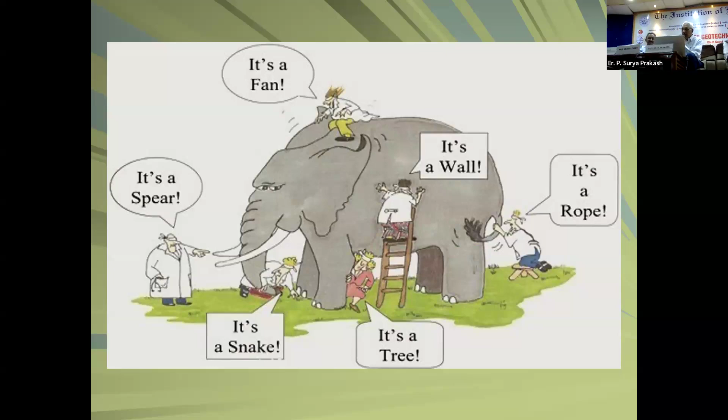So basically what I would like to say is that these are the GeoSutras I presented to the International Society: that the ground and soil are not the same. Soil is an element I can pick up in my hand. Ground is an entity at the site. So there's a big difference between those two.

Ground is not homogeneous or semi-infinite, which is what many of the people in the analysis assume. Ground in nature, in most of the time, is over-consolidated. That is, it has been subjected to higher stress, and that is why, if we don't consider that, we over-predict settlements, and Balaji highlighted that actual settlements were much less than anticipated for the simple reason the over-consolidation effect is ignored.

The other one which I will be presenting also: ground is not steel. Coming to bearing capacity, the whole concept came assuming the ground to be steel. And I'll show you why. And the properties that you get from these agencies are from the laboratory. The ground has a very different set of parameters.

And I'll elaborate on these in my presentations too. And then, of course, there are many other things too. But what I would like to come back to would be, what are the GeoSutras for the structural engineers?

Again, soil and ground are not manufactured material. The problem with structural engineers is they deal with cement, steel, concrete. They don't deal with the natural material. I'll come back to that again.

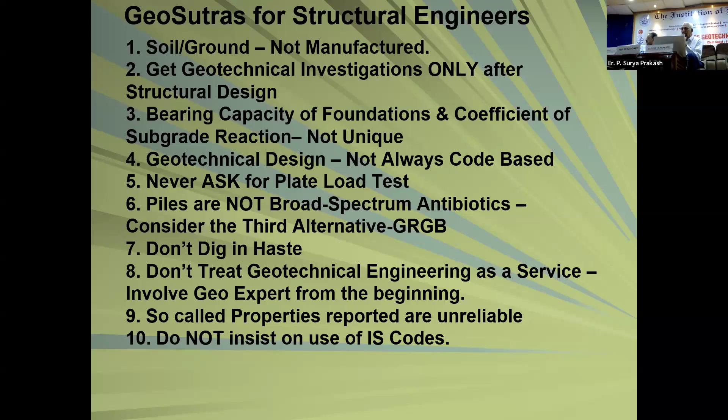I just want to give you an idea. Look at the kind of soils we have. I put it on the right-hand top corner. The variety of soils is infinite. You can have gravel, soil, sand, silt, clay, brown, black, whatever it is.

And if you look at the bottom right-hand corner, we see the people. If you look at the country, do you think all people in this country are the same? We're all human beings, I'm not saying otherwise, but can I say that you can see the variety from Northeast Arunachal Pradesh to Kerala, or Kashmir to Kanyakumari? And look at the ground, the left-hand top corner.

If I have an X-ray, I can visualize the kind of strata you have - different layers, different thicknesses varying everywhere. Or even a simple bridge site - can you see how the thickness varies? At the center of the stream, you have high, soft soil. As you go toward the embankment or the bank, you have a different strata. Can I give a single value for this site? That's the biggest challenge we have.

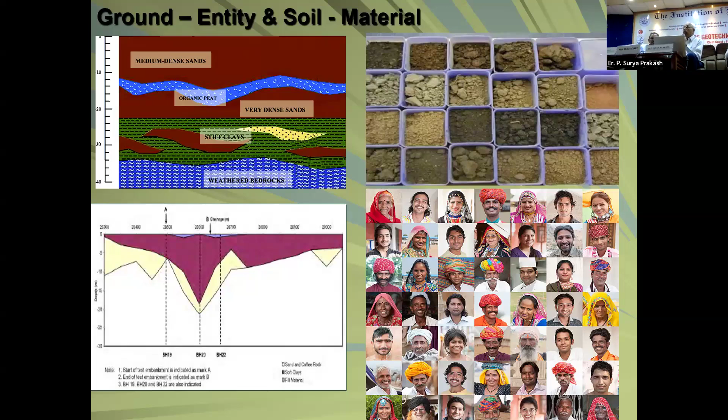The point is, even a crowd can start becoming a mob. You know what's the difference between a crowd and a mob? In a crowd, you have your individuality. In a mob, you don't. Somebody says, burn that bus, kill that guy.

Does anybody think? No. Similarly, I have a small soil element which I test in the laboratory, or I have a ground. When I go to a site, maybe it is something like 100 meters by 75 meters - that's a large area. Can I take 2 samples which are 75 millimeters long, 37.5 millimeters in diameter, get some property, and say this is the property of the whole ground? That is how it is.

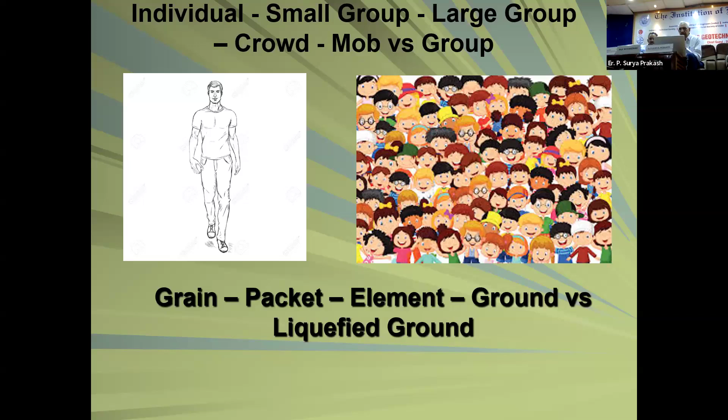This is on the positive side too. There are some other problems too, but I'll come to the third one. This is a multi-story complex in one place where they had alluvial soil, as you can see, and the values increase with depth. And the report says go for pile foundation. They recommended very low bearing capacity, but pile capacity of something like 120 tons.

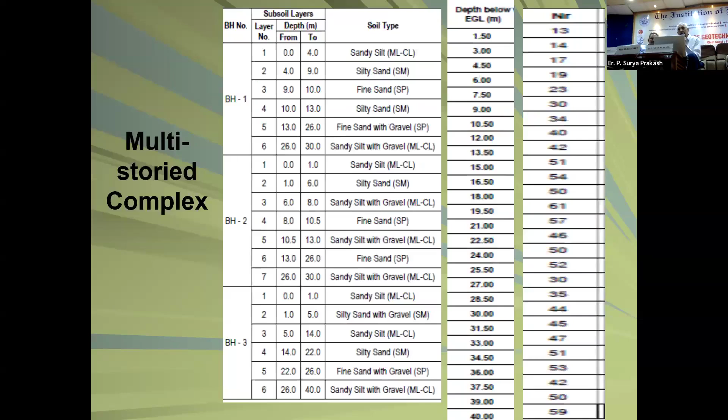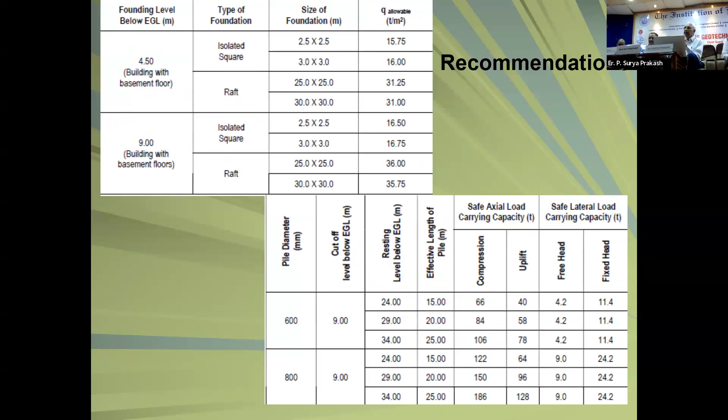They came with the same data for me. I said, this is ridiculous - this ground can give me a very high bearing capacity. After my calculation, I gave them a value of something like 300 - I mean they gave more, but they decided on 223 tons as the pile capacity. They are not very sure. I'm sorry, 316 - sorry, 24 meters. I gave 320 or 316 tons as the pile capacity. This is again in Ghaziabad and Noida. And I said, I can prove it.

I said, if you're ready, you can go up to 450. But of course, no, they saved anyway about 40% of piling, which means cost became much less, and they were very happy with that.

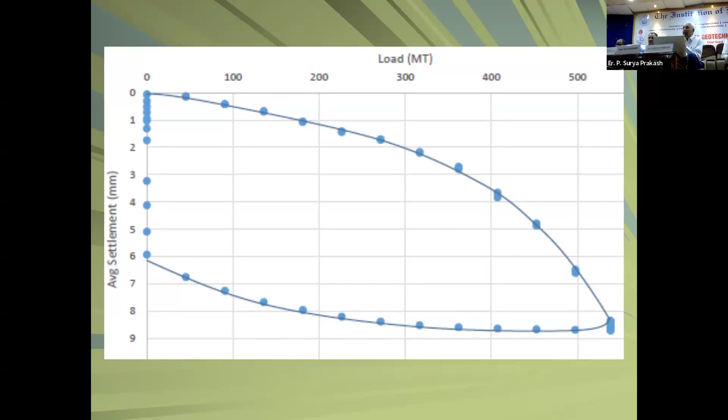So what I want to present to you would be very important. The important thing in science of life is not so much to obtain new facts as to discover new ways of thinking about it. Please remember, I want you to switch off from your traditional value, thinking that soil or ground is something I can test and get the value. It's much more than that.

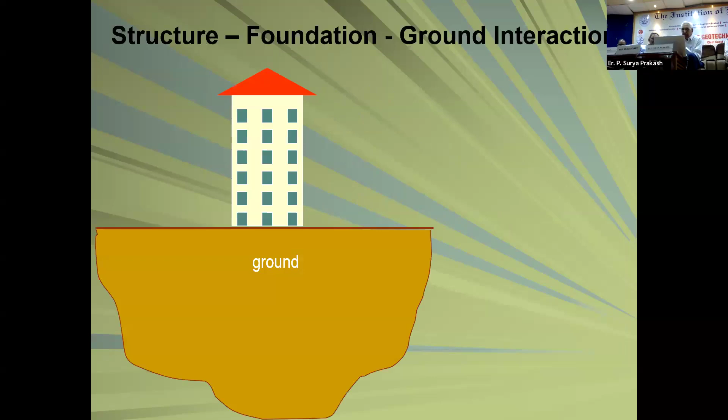I want to tell this to structural engineers that they're very good at designing something above the ground. But every building has to rest on the ground. Isn't there an intermediary which takes the load from the structure and transfers it to the ground? It is called the foundation. So don't you think the people who are investing so much on structural design should know how the ground behaves, or at least interact with people and come up with the proper design.

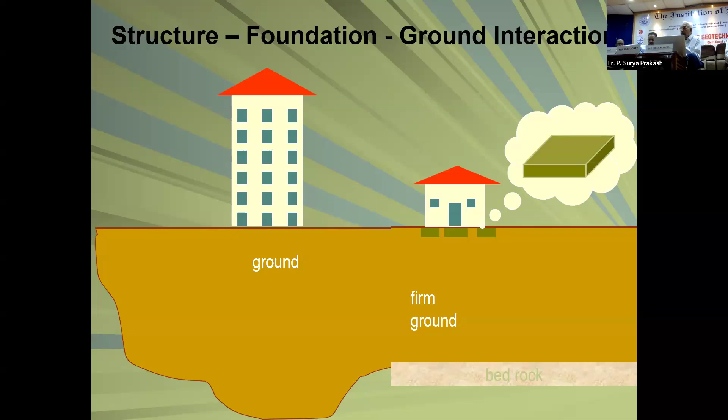That is the biggest problem. The reason is, there's a lot of difference between structural and geotechnical engineers. They deal with steel, whether you buy from Tata, ArcelorMittal, or SAIL, the properties are the same - 415 megapascal, 210 gigapascal, 550, whatever it is. And concrete, you say I want M35, M40, they're again manufactured materials, and most of the time we get it from RMC, and you know the property.

But as a geotechnical engineer, am I dealing with a manufactured material? It's a natural material - if you are spiritual, you say God made it - and the properties are constant or variable. You add water, what happens to the soil? It becomes soft. If you dry it, it looks hard. So can you say it has a fixed property? No, that's the problem. There are a lot of complexities when you are looking at the interaction.

Please remember the three things: the ground, foundation, and the structure. It's not one alone, you have to have that perspective. There's a lot of uncertainty in ground conditions. If you put two boreholes, one here and another there, will you get the same characteristic? No.

How much do you spend on geotech exploration? Normally, we recommend half to one percent of the cost of the project. People are thinking about it - they say 10,000, 20,000. And some other people, they're like bargaining when you go to buy vegetables. They say some kilo is 40 rupees, can you give it for 30 rupees?

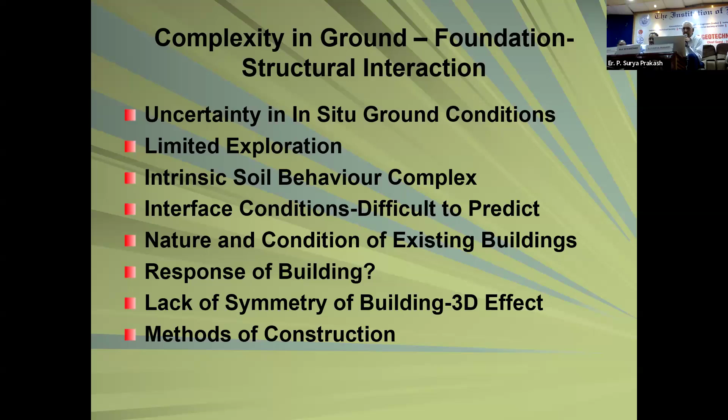How do we construct? The other thing is structural engineers use a lot of mechanics, very good theory, it works, geometry is known. You have a column, beam, slab, etc. Are there any complex geometries, unless you're looking at one of those very special shells? Material properties are known, a lot of theoretical solutions are available, and you have a code for the design.

I'm a geotechnical engineer, I'm looking at a variable geometry. I showed you how the varied properties of strata vary at big depth and over the site - highly variable. I cannot even know the property or design precisely, I can't determine it. Give me any property, and I'll show you the opposite is also true. Loading is very complex too. So when I give a decision, it is not code-based, it is judgment-based. I use judgment, that's what I do.

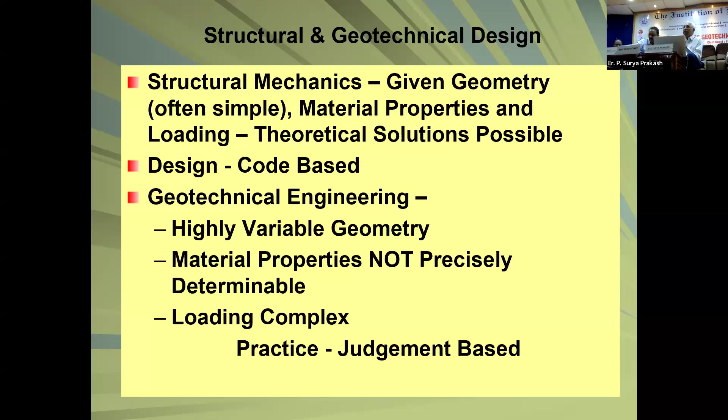So here I want to say something. Those of you who are married, I would recommend you read this book: Men Are from Mars, Women Are from Venus. It's a fantastic book by John Gray. You will understand your spouse. If you are a male, you are left-brain oriented, highly logical and analytical. Women are right-brain oriented, they have much better vision, image processing, fantastic language skills and other things.

I'll give a simple example. I want any of you to try this - if you wear a wristwatch, cover it. Can anybody try? Can you tell me what is the dial - is it Roman numeral, Arabic numeral? No. I can tell you 90% of the men wouldn't know. But ask a lady - she goes to a party, she remembers who wore which saree, which jewelry, and she will remember whether they wore it at the previous function.

This is a fantastic right-brain oriented creativity. What you need when you're dealing with ground is that kind of right-brain oriented work. So structurally, these are from Mars; geotechnical, they are from Venus.

We should encourage more women in geotechnical. Men are there, but they have to use their right brain. You can't take away the men, they're already there, but in geotechnical engineering, in tunnel engineering, we have a lot of women coming, and we're okay with that.

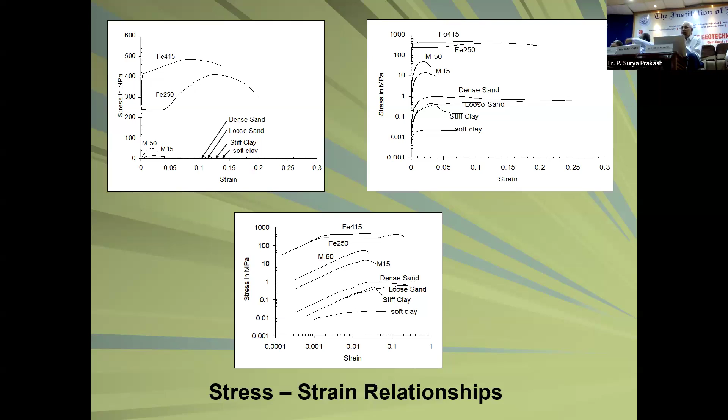Just to give you an idea, these are the numbers. Steel, ultimate stress is 415 MPa. The E value is probably 2 into 10 to the power, around 210 gigapascal. Whereas if I look at soil, the strength is hardly 50 to 100 kPa. The modulus may be 1 MPa.

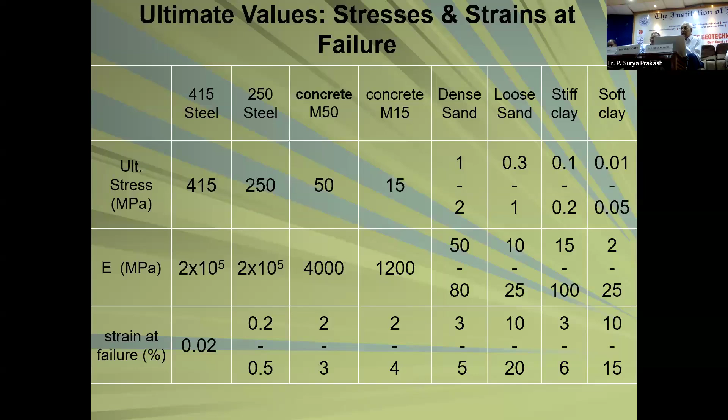And we assume the bearing capacity theory given by Terzaghi way back in 1943 is valid even now. He gave this because Terzaghi was a mechanical engineer and he studied Prandtl's mechanism. Prandtl worked on punching of metals. You got an ingot, how do you press it with this thing and get a sheet or a beam or roller? He took that theory, and this is what we all accept now. In all textbooks it is there. It's terrible. I'm trying to convince that we should not teach this at all.

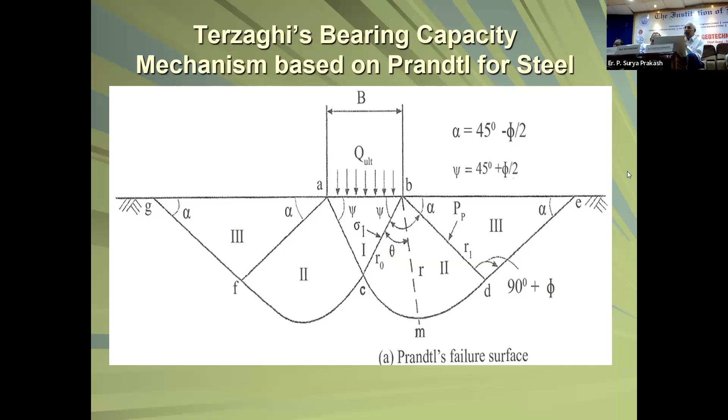Then we said, oh no, it's compressible, so we said general shear failure, local shear failure, punching shear failure. But honestly, it's not that simple categorization. Any of us today, I'm very happy, tomorrow I may be sad, in between something else. We keep changing, it's a gradual transition. There's nothing we can say specific. We should come with an appropriate theory, which we have been doing. It's available instantly, but we don't practice it.

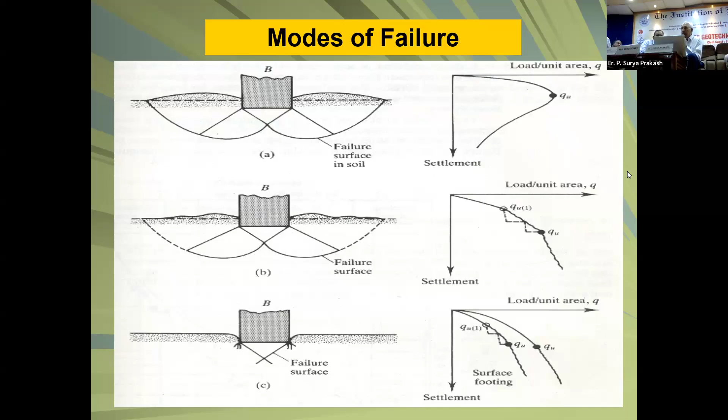Then this is the simple load settlement graph for a foundation. You can see that as you increase the load, the settlement increases, and at some stage it becomes so large it may tend to fail. We take the ultimate value, divide it by factor of safety, and get the safe one. But still we have to satisfy another serviceability criteria, which means how much settlement do I want. So I come back to the settlement criteria.

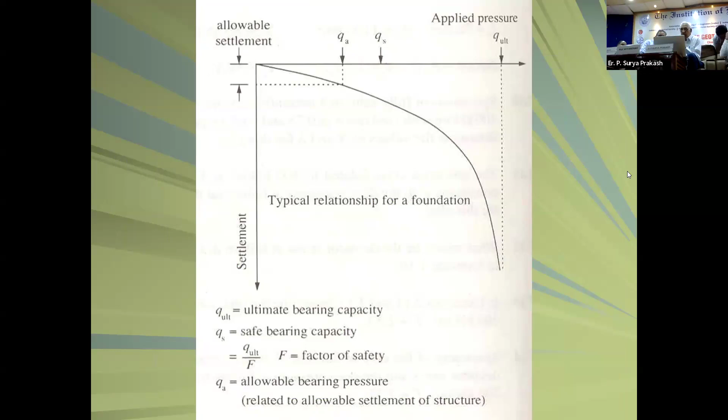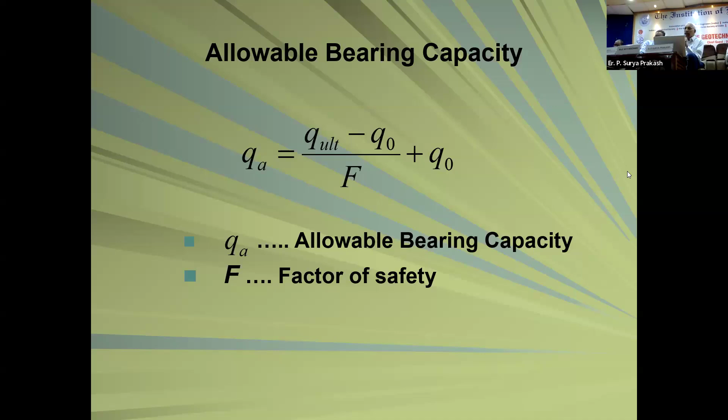As you can see, if I consider the increase in strength with depth, which is what most sites show, if you go deeper you get higher strength. You get about 30 to 50, even 100% more bearing capacity. We don't accept it. We have several situations where I can give you the solution for homogeneous finite layer. You get hard rock. In Hyderabad, for example, we are very lucky, you get very good soil, very good hard rock within 10 meters or 8 meters. So we can come with this.

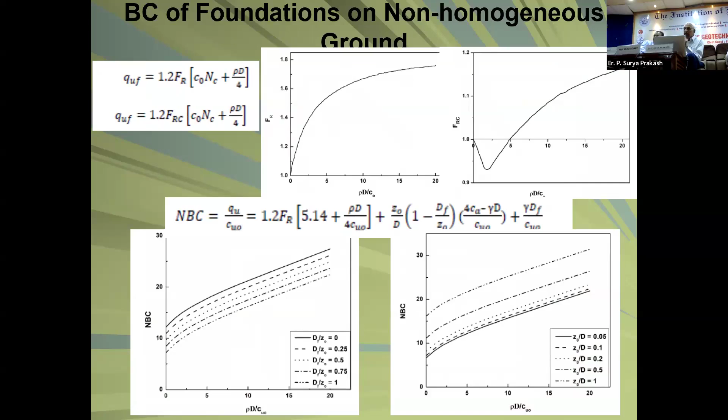Now let me come to another point. People want a plate load test. I don't know why, because they think some load test gives them confidence in what the ground can take. Just imagine, a plate is hardly 300 to 450 mm in size. The zone of influence is twice that, 600 to 900 mm. Whereas my foundation is 4 meters, the influence is 8 meters. Can I extrapolate from 600 mm to 8 meters? The ground conditions are very different. That's the problem.

So if somebody comes to me, I say, don't waste your money on a plate load test.

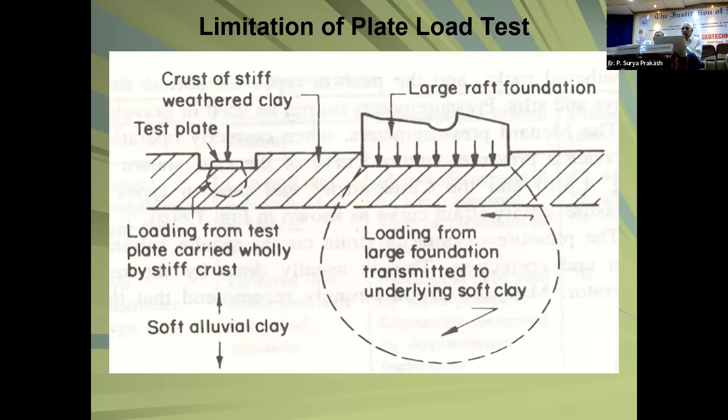As someone recently said, the number of stories is going up—30, 40, 50, even 60 in Hyderabad. To make money, you want to go down too. 3, 4, 5 basements are common. Once you go below, you have a bonus. How many of you realize this concept is called floating foundation?

If I remove, say, 4 basements, 3.5 into 4 is 14, plus 2, that's 16 meters of soil removed. This means the soil has been unloaded by 16 into 1.8 tons per meter cube, something like 30 tons per meter square. Even if you put load on the ground, it won't know.

This is a problem with all these investigation agencies. They give you a bearing capacity of 20 tons at 5 meters. But I removed all that material, so the soil doesn't feel anything. We are missing a lot by not considering how much excavation, how much material we have removed, which is a bonus.

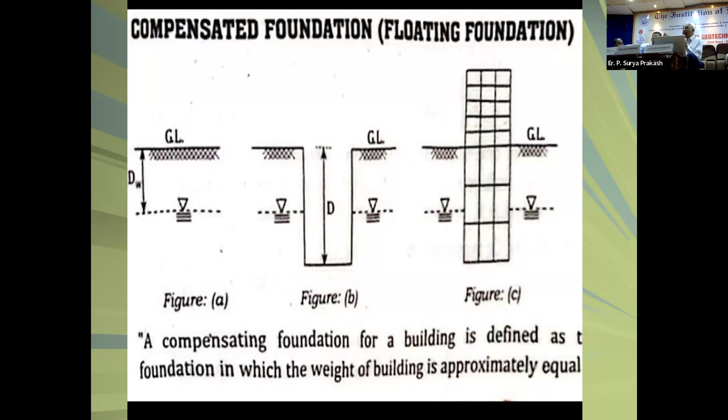I want all structural engineers to remember this. I may charge a little, but I can give you my worth. Many times I give them an option: my consulting fee is some X amount, or you give me 10% of the money you save. Then they agree what I said was okay. This is the problem—they think whatever I give is still too high a figure.

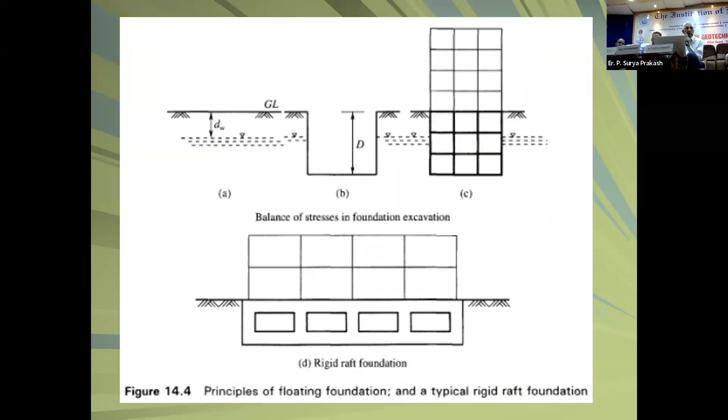So basically, by going deeper, you are gaining a lot in terms of carrying capacity. Please remember that. Then going deeper brings other problems—excavations.

This is the biggest problem I find. Everybody wants to dig first, even before they design the whole thing, and it collapses. It is very easy if you spend maybe 2 to 5 lakhs to do nailing and support. There are many ways of supporting it, but we recommend nailing normally.

I can tell you any number of horror stories. Even in Hyderabad, my recommendation would have been about 2 to 3 lakhs spending. They said, why should I waste my money? Then the excavation collapsed. The neighboring buildings were affected. It became a police case. All the people from the building had to be put in a hotel and lodge for 3 weeks. They spent 50 lakhs. In one case, there was a mortality.

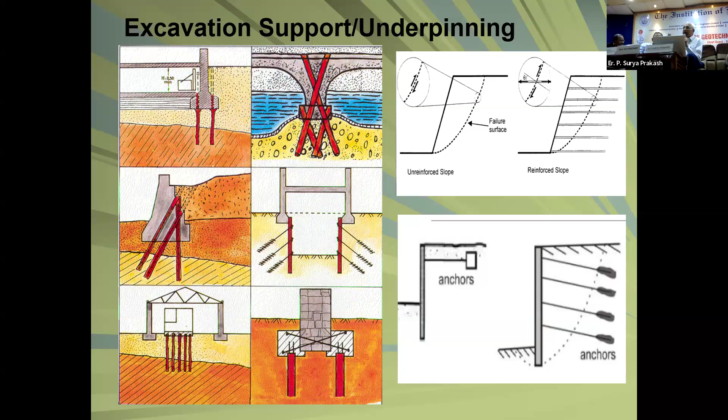And you know what happened? The police came, the politicians came. The guy spent 1 crore, all because he wanted to save 5 lakhs. This is the kind of penny-wise, pound-foolish thinking.

Or we say, a stitch in time. The other thing is this bearing capacity is a very crazy thing. Honestly, the whole thing is based on foundation, but they never looked at the structure. Now structures are going higher and higher up. If you look at it, the higher the structure, bearing capacity is not the problem—it has the tendency to tip.

I wish I could show a simple example. Go home, take some heavy books, put them on a table, and they will all stand straight. Now put a pillow down, and on the pillow put the books, and see whether the books will be stacked straight. This is what happens if I put up a tall structure.

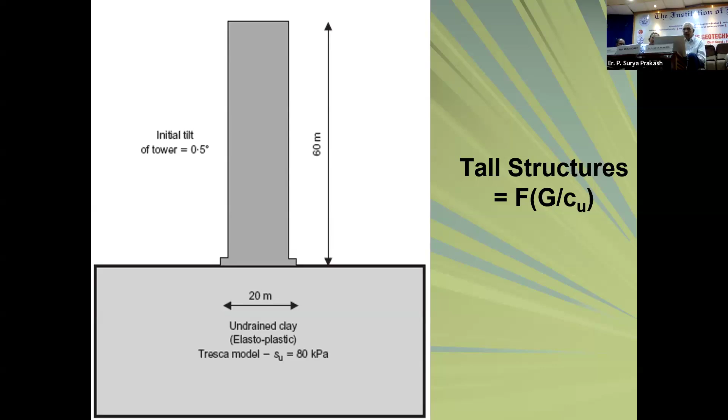So here's a simple simulation we did on the computer. I took a 60-meter tall structure and put it on a 20-meter diameter foundation, and we varied some properties. Depending on the compressibility of the soil—if G by Su, G is the shear modulus, SU is the undrained strength—if it's highly compressible, it rotates and sinks much more. If I increase the shear modulus or reduce the settlement, I get a higher capacity and less rotation.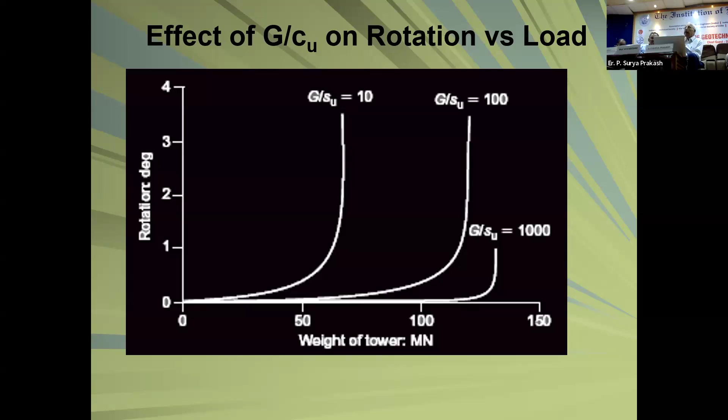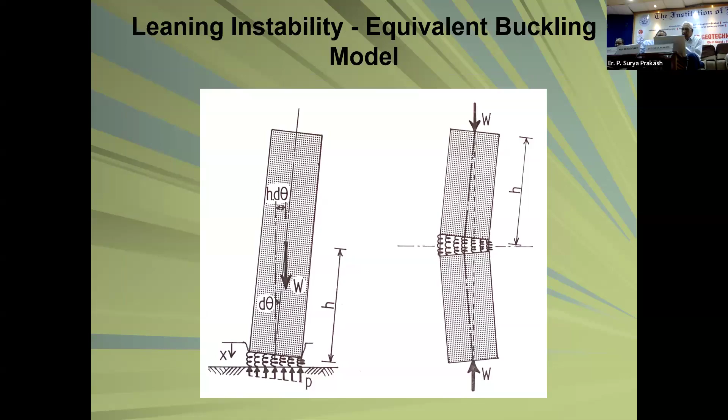This phenomenon we call leaning instability, similar to structural buckling. I keep saying this ought to be considered too when looking at tall structures—they have a tendency to lean, and we can easily prove it's sometimes a function of time. Over a period of time, settlements increase, so we may get this leaning instability. The Tower of Pisa is a classic example. I have at least half a dozen cases in India where towers are leaning. We don't accept it, but that's a different story.

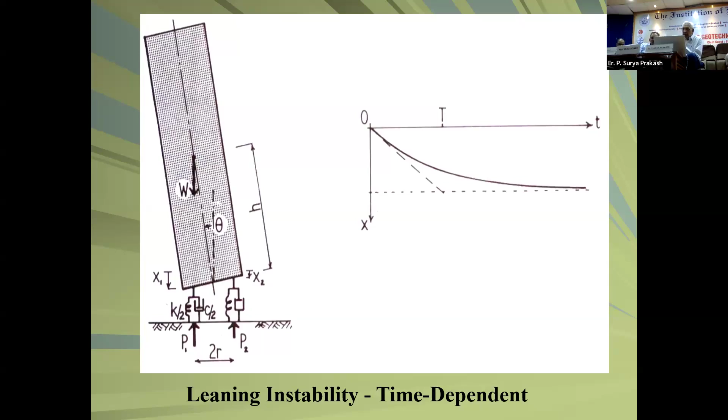So I just demonstrated this in my lab. If I reduce the height, put a small foundation, or if I put a low-rise building or a high-rise building, I get different load capacities. If the height of the structure is less, I get higher bearing capacity. If the height of the structure is more, I get a lower value.

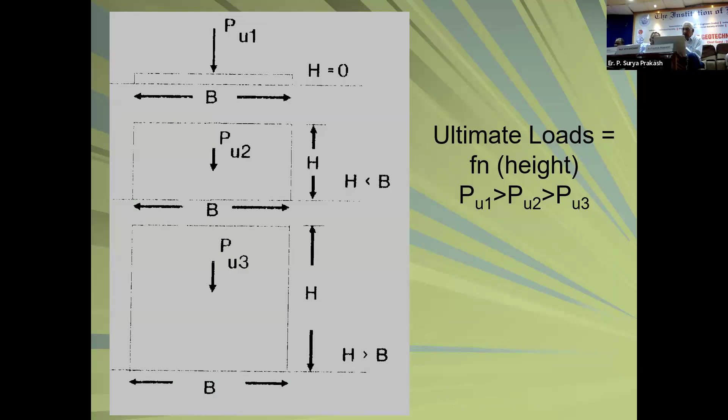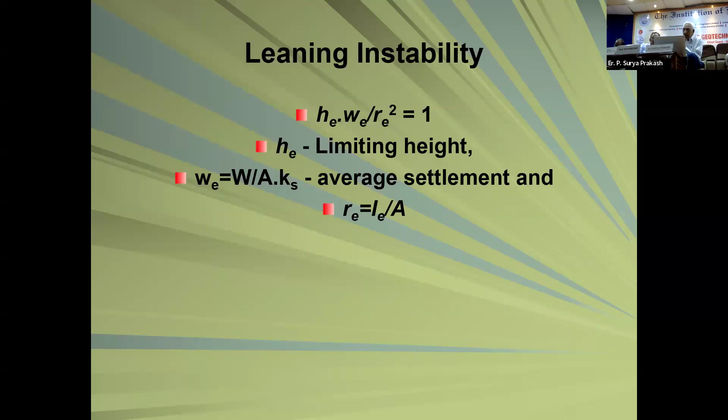This is the book's example. I applied this mechanism, and it's easy, like leaning instability in structural engineering gives you the Euler formula, etc. We have a very simple one: the critical height into settlement by radius of gyration. If it is 1, it's going to collapse or tilt. You'll be surprised, the tower's size is exactly 0.96, so it is actually leaning instability, it is growing.

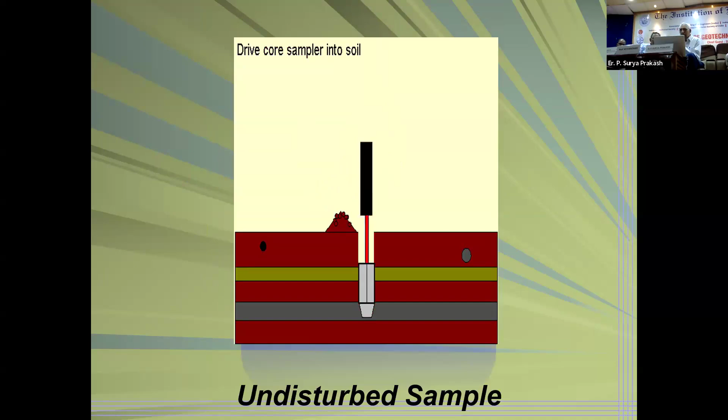So coming back to our story, we do investigation. We put an auger, take some soil, which we call remolded soil, and then another one that's supposed to be an undisturbed sample. But there's nothing like undisturbed, it's a very crude way of doing it. Based on that, we get liquid limit, plastic limit, and classify soils as clay, silt, highly plastic, low plastic, etc.

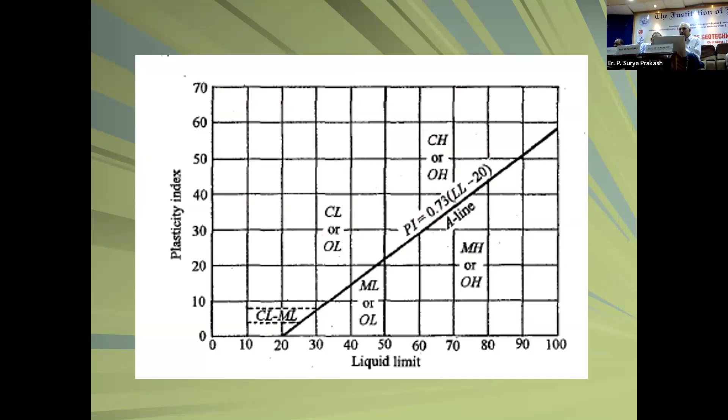Then grain size varies and permeability can change a lot. Sands are 10 to the power of minus 3 centimeters per second, clays are 10 to the power of minus 8 centimeters per second. So a whole range.

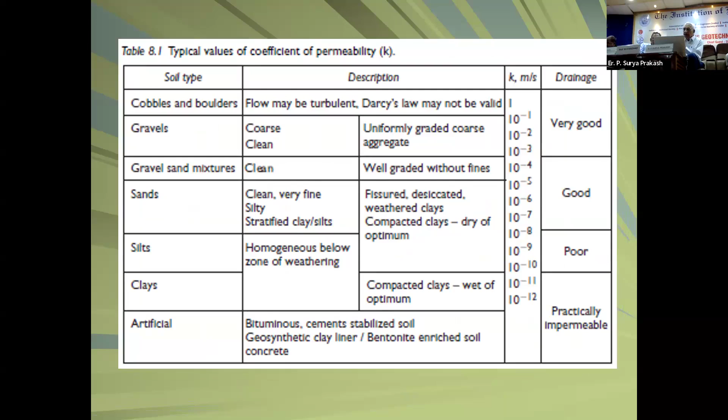The other thing I want to show you: everybody is worried about expansive soil, black cotton soil. Honestly, they're not a problem. We're all afraid of COVID, but if I put on a mask, did I protect myself? So think of black cotton soil as not a problem - when you add water, it's a problem. If I don't allow water to come in, there's no problem.

I have a simple solution here. How the water content changes - the linear increase is the neutral one. In rainy season, the water content increases to the top, and in summer, the red line shows it decreases. But if I go 2 meters, 2.5 meters, there's no change.

So all my recommendations are for structural engineers: just don't panic because of black cotton soil. Go to 2 meters and put your footing. You get a capacity of 50, 70, 80 tons. Even compound walls are built this way - just go 1.5, 2 meters, put your footing, every column would be something like 5 to 7 meters apart. Put a grade beam, put your wall. So unnecessarily we are panicking because we are not thinking about it.

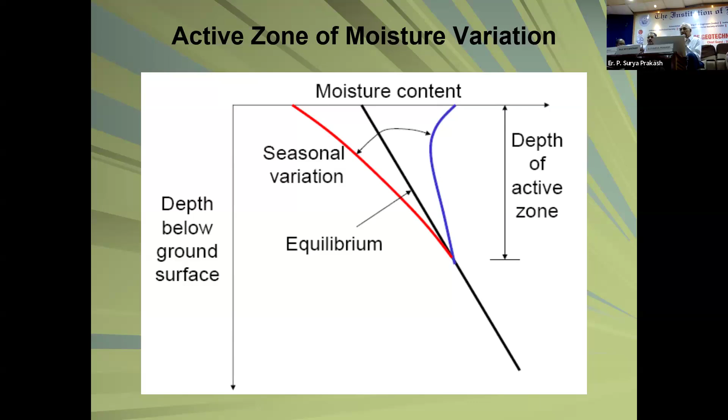We do some simple tests. Recently we did a project where we found that the expansivity is very low. So why worry about it?

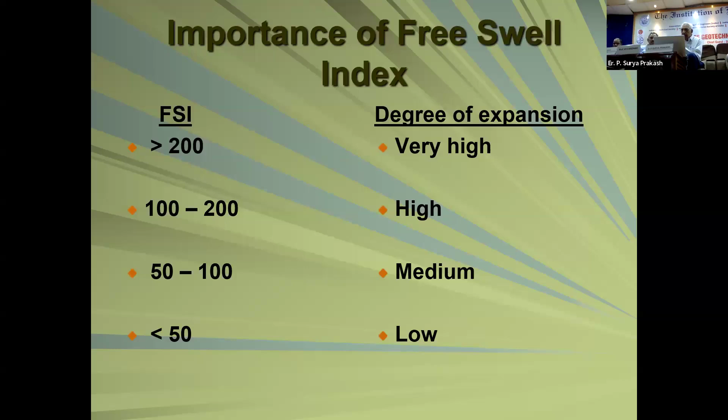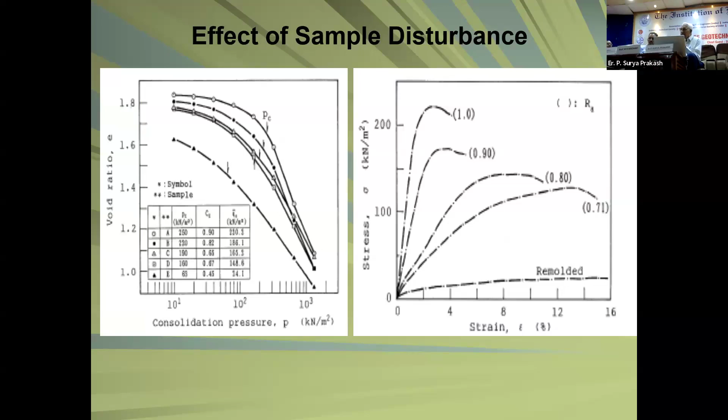These are the kind of stress strain curves - the one on top is the real behavior of the ground, the ones below are what you get from the lab. Very different. So I had to use my judgment based on this, how to come back to the proper value.

So I try to depend on different correlations if I have a natural water content. Please insist, if they are going to test it, get me the natural water content - I think this is something you should insist on, the least thing they do on site. We have very good microwaves too, you can test it in 5 minutes and get the value, which is very reliable.

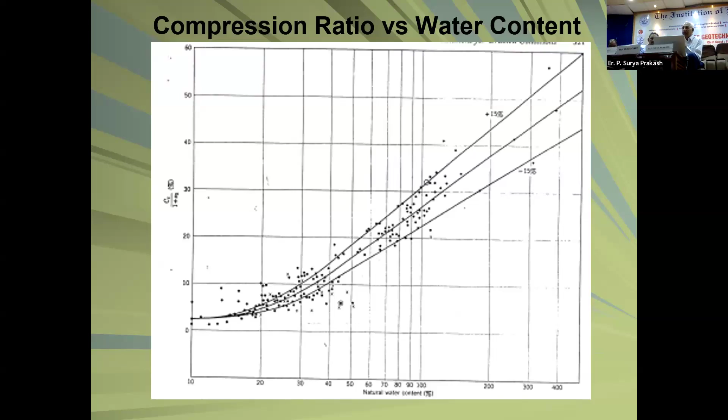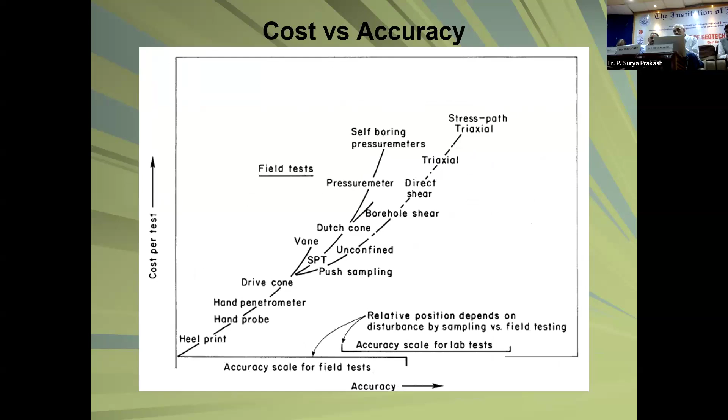Not like other properties - the more you spend, the more accuracy you get. If you spend less, people say I spent 20,000, 30,000, I get a report, but the foundation design, concreting, site is much more. Whereas if I spend more, I can reduce it, it will be better. So there's always a relation between how much you spend on investigation and what accuracy you get, how much saving you get. So I tend to believe that laboratory values are not reliable.

Try to go for in situ testing. SPT is a very common one, but I would recommend the cone penetration test, which is very, very reliable. There are much more sophisticated ones used in Europe, Japan, etc. But in India, we're very conservative - we don't want to spend money, so we don't. So if you do peanuts, you get monkeys only. That's the kind of thing.

So you end up with all these agencies in Hyderabad who will give you some value for somebody who comes to your site. I'll give you 1,200 rupees per meter, I'll give a report. Whether he put even 5 more holes, nobody knows. They're all manufactured too. So that's the problem.

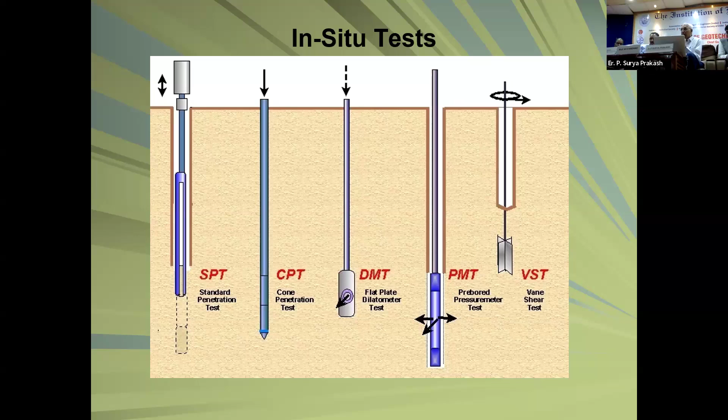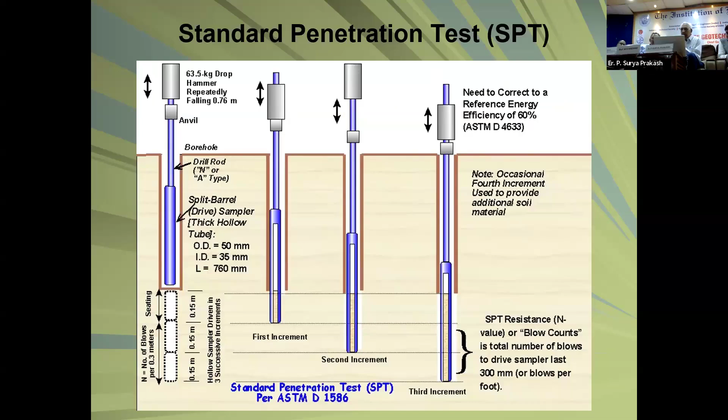So what we do is we put SPT, we drive a tube, put a hammer, drill it, hit it, and then get a value. We can determine quite a few things from that value. If the value of N is between 0 to 4, I know it's loose sand, relative density may be 15. If the value is 4 to 10, I know it's mid-loose sand. Then if it's 10 to 30, medium - I get a feel for that. This is what I try to derive, combined with many other things.

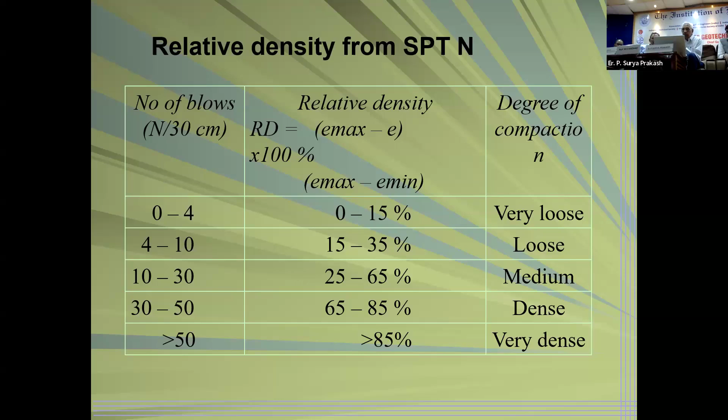I have a lot of other correlations too. Then we have the cone penetration test. SPT is one number, please remember. Cone penetration, I get two - the tip resistance and the shaft resistance.

You get a continuous profile. With SPT I get only a value at every 1.5 meter interval - it's a very slow process. Whereas with cone penetration, I get a continuous profile, and even if I don't see the sample, I can classify whether it is sand, clay, silt - many more classifications. I don't want to give the whole lecture on that.

We also have how to correlate one from SPT to cone penetration. I have some relations too, so I use them sometimes to convert one to the other.

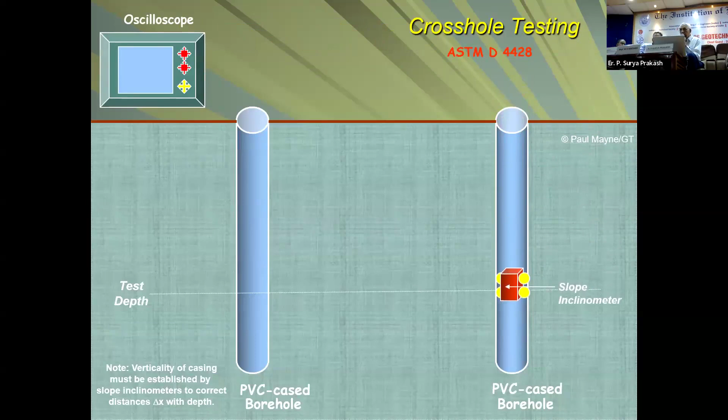Then we are doing a lot of dynamic tests. Wave propagation is one of the best ones. If I, as a person, go to a doctor, they're doing a lot of ultrasound, CAT scan, NMR. What are they? Basically sending a signal, finding out what is inside. This is exactly what we do in geotechnical engineering. I can find out cross hole, downhole, uphole, whatever it is - I can get all the properties.

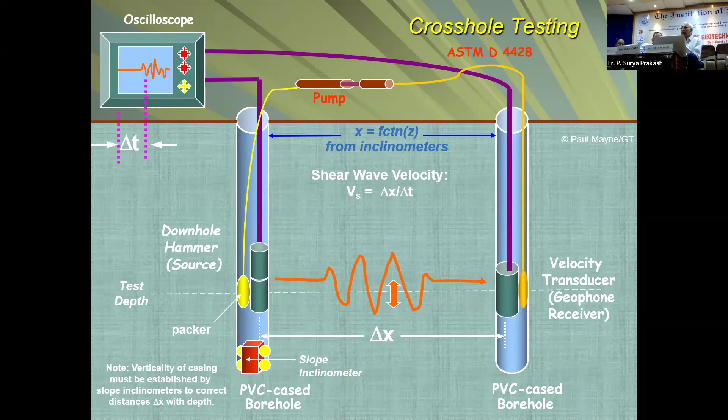Dynamic properties, which again I use now. Then we have a very sophisticated one, called MASW - multi-channel analysis of surface waves. I give an impact somewhere and pick up the signals over a distance. I get the whole picture. This is a very sophisticated one.

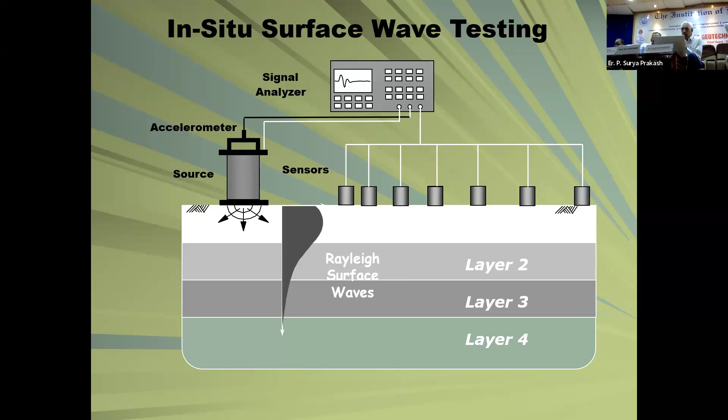Then it comes to planning. Do we involve a geotechnical engineer in planning boreholes? The qualified guy has to decide what is the project, what are the locations, how many boreholes should I put, what is the depth, etc. So we had to work with a geotechnical engineer to decide on that.

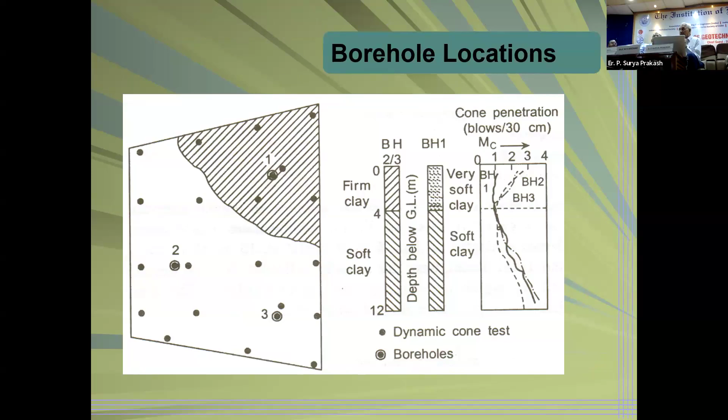Here is one example of a tower foundation, multi-story. Look at the number of boreholes they're putting. You are investing something like 500 to 700 crores - don't you want your investment to be safe? Don't you think you shouldn't cut corners? Suppose if I give you 100 crores, will you just dump it in some bank, or will you make sure that your investment gets a good return?

This is what I want you to think as a structural engineer. My job is to make sure we get a good response from the ground. And how do I go about putting the number of boreholes? Consult a proper guy - otherwise you end up with a scamster.

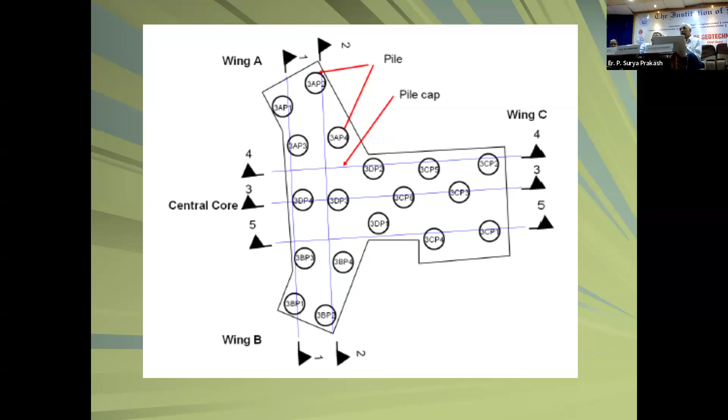Everybody predicts large settlements, but they don't get it, which is exactly what Balaji has told us. That is because we ignore the over-consolidation effect.

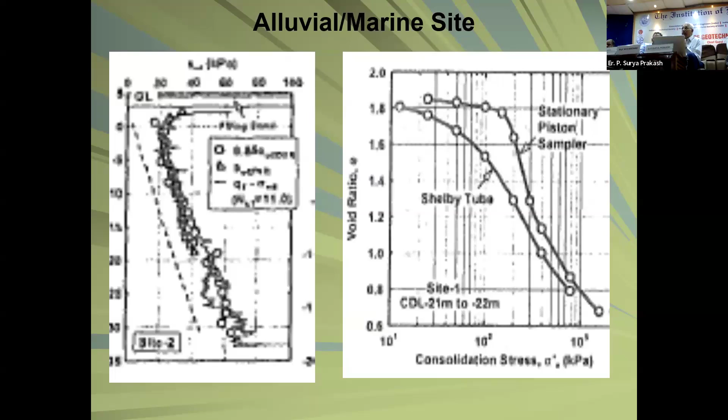And I normally try to come up with this picture - how to divide the strata, unit weight, SPT, whatever properties are. Based on that, I do the analysis.

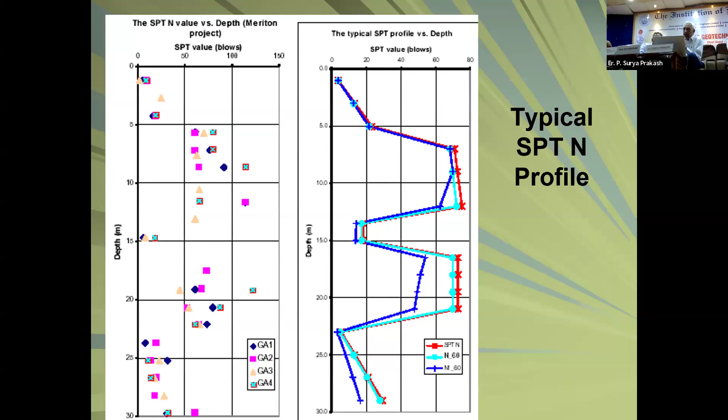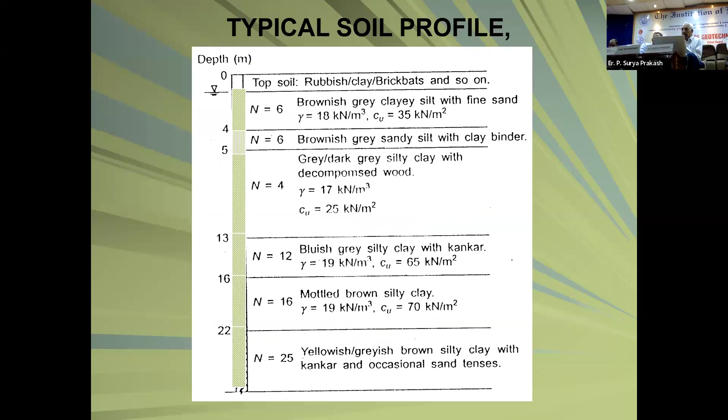These are some other variations which I can put in. You have to visualize the ground and assign properties at different levels - it is not a simple homogeneous value. Then I had to work it out based on that. Okay, these are the kind of things.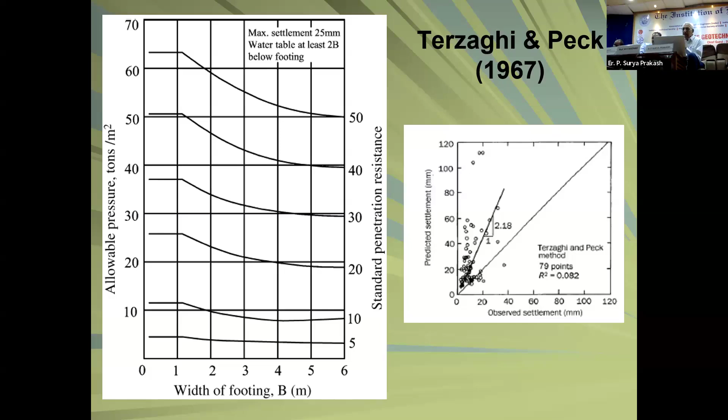Now coming to the code-based approach. In 1967, a method was given and the IS code still has that. Everybody knows it's over-predicting, which is very safe. So near 1970, they said you can increase it by 50 to 75%. But unfortunately, by 1985 and earlier in 1971, we had better methods of estimating. If you give me a site with proper investigation, I can do a good analysis of finding out how much settlement it can predict, which is more related to the actual ground condition, not a simple chart.

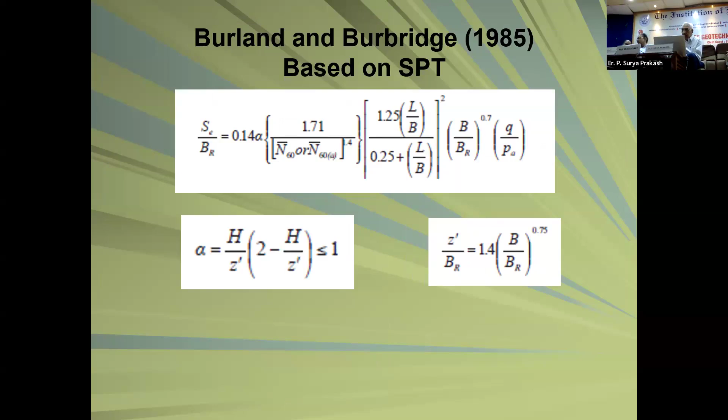Similarly, if I use cone penetration, we have the Schmertmann method. I can again predict more accurately and get good values.

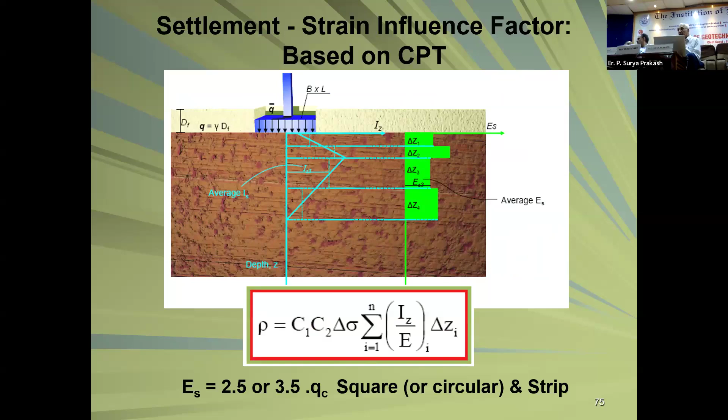Then there's another important philosophy I've been saying: piles are not the answer. That's because all our textbooks talk only about shallow foundation and deep foundation. Am I right? Do they talk about anything in between? I say no—there's a third alternative where I can give you a solution.

So what I did was look at structures and classify them as light, medium, and heavy. A light structure is a 1 or 2 story small building, maybe with a capacity load of 7 to 8 tons per meter square. Medium is a 5 to 7 story building, with average load of 15, 20, 25 tons per meter square. Heavy structures are bridges and other very heavy, tall structures.

So that's 3 categories of structure. Then for ground, I look at soft soil like marine clay—you find this in Visakhapatnam, Tuticorin, Chennai, Goa, very soft soil with strength around 10 to 15, 20 kPa. Medium stiff are alluvial soils like the Indo-Gangetic alluvium, and most residual soils across the Deccan Plateau, with strength around 50, 70, 80 kPa. Then you get hard rock.

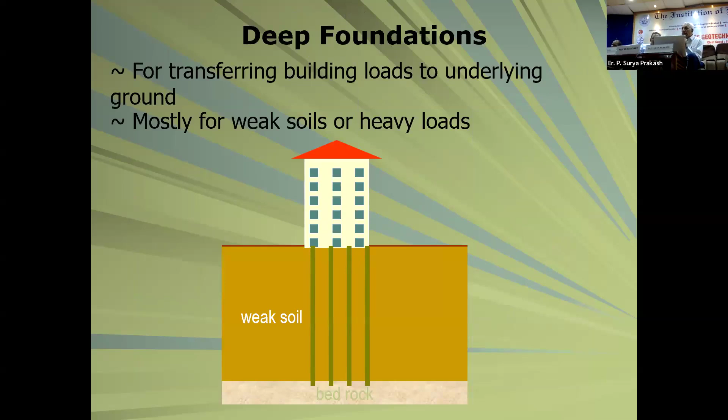So when I take a factor of safety, let's say 300 tons is the ultimate load. Using 2.5, I get something like 125, 140 tons. If I put 140 tons on the pile, how much goes to the base? Hardly anything—almost all of it goes to the shaft. We're all the time worried about end bearing, but honestly, at working load, very little load goes to the end bearing. You have to look at how much load transfer happens between these two.

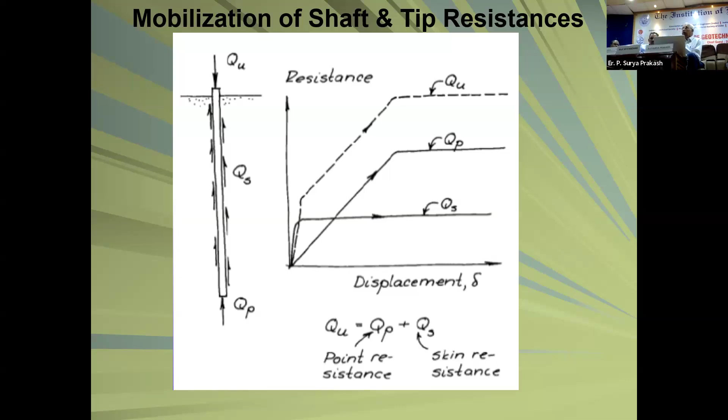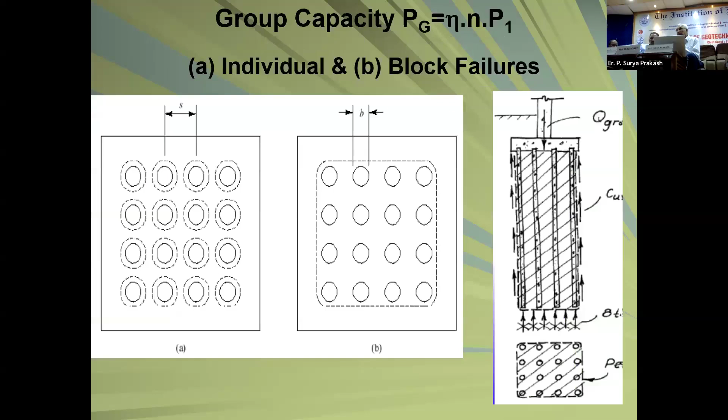Then when I have a large number of piles, isn't the zone of influence large? I look at the whole bulb action, group action—so we consider different failure modes, etc.

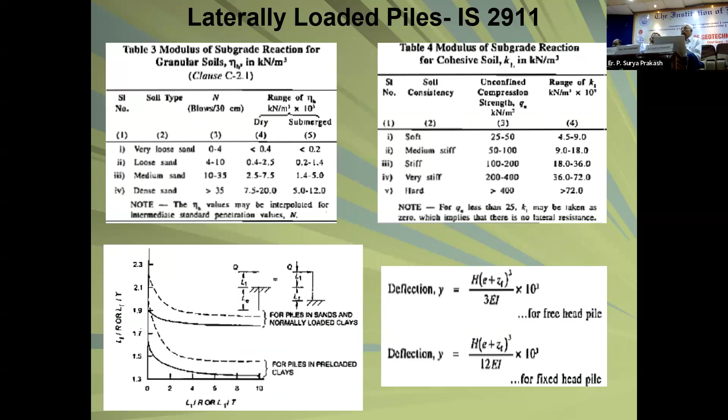The biggest joke in our Indian code is the lateral loaded pile—it's the most atrocious, I can say. It says you can design a lateral loaded pile by giving just one modulus of reaction. You've seen how complex the soil profile is—can I really do that? Since 1960, we've had solutions available for analyzing lateral load capacity, whether it's a fixed head pile or free head pile—I have charts for them.

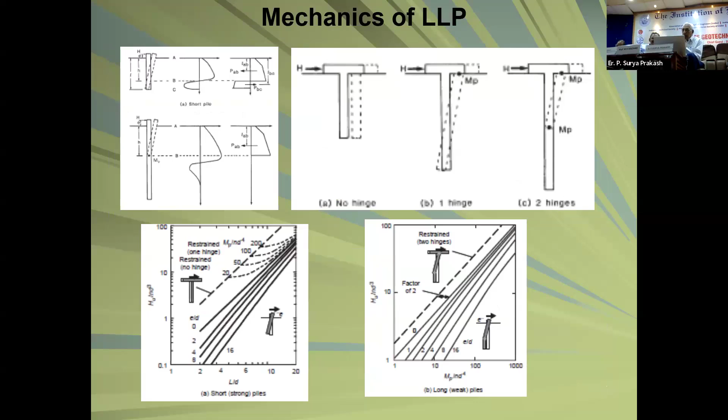But the code somehow doesn't want to change. And another problem is that I need to analyze this compared to a lot of structural issues too—Winkler foundation, I can use the same approach for piles. There are also continuum approaches. So I use all of these methods that have been available for the last 50 to 60 years, but our code is still stuck in 1964.

And you'll be surprised, what's even worse, I can tell you, is scour. Do you know the story? The IRC code on scour was based on Lacey's work from 1930. And what did he work on? Canals in Punjab—not a river.

And we use that. I have a problem right now. Somebody said scour is 38 meters, so the pile has to go 60 meters. And when you calculate the lateral load, 38 meters is a cantilever.

Can I get any resistance on the scour? It's terrible. Okay, so this is the state of geotechnical practice. That's why I say, let's engage a qualified person. Don't believe in these quacks.

I call them quacks. I mean, if I have a boring rig and about 5 lakhs, I can start the agency, and I'll say I'll come to your site and give you what actual costs maybe about 3,000 rupees per meter to do a proper job. How many of us would like to go to a roadside quack instead of going to a proper medical doctor if we have any health issue?

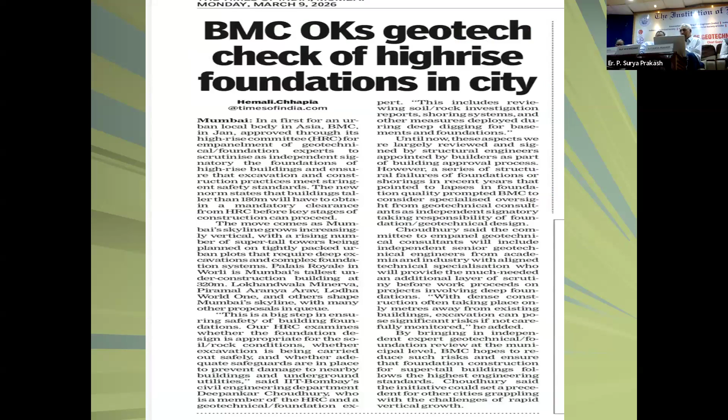You need to have it. If you don't have, we pay the price. I would like to say honestly it's teamwork. If you don't work together, this is what happens. So please remember, we are all together. We are civil engineers, we have to work together, right?

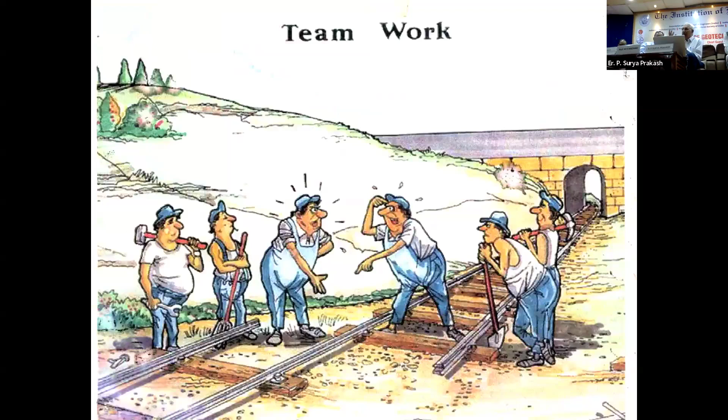So when I teach geotechnical engineering, I may teach something simple, but when I practice, it's not simple rule-based. You have to go beyond the rules. That's what I do. Thank you very much.

I have another analogy when I'm listening to Professor Madhav. He was comparing women and men initially. Now I want to compare structural engineering to mother and geotechnical engineering to father actually.

I don't know how many of you experience this. Mother's love and affection you can experience right from birth. And the structural engineer can experience the structure right from the design basis report. That is mother, actually. Whereas in geotechnical engineering, I have been experiencing it till now.

I've been learning, understanding more and more as I'm working. That is father, actually. We understand father till his last breath, and we can't understand completely even that. So geotechnical engineering is also like that.

It is such a deep subject. We have to work on thousands of projects and infinite time. Then only can you really understand and get expertise.

And Professor Madhav Garu is just 88 years young today, and he spent 1 hour with us. He is like a father today for all of us in geotechnical engineering. Thank you. If you have 5 minutes, I have whatever.

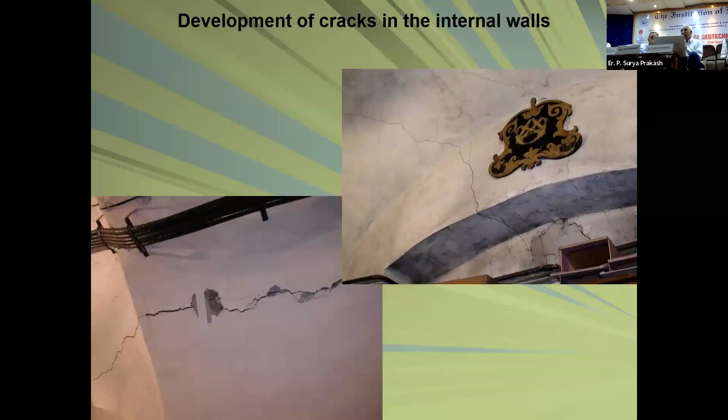Okay, these are the details of the cracks. They all have that. Then they had to do the analysis for the building, how it is deforming, etc. So again, please remember, it's a combined structure-geotechnical interaction problem. So they put everybody together, analyzed the model here, and here is the soil investigation done at the site.

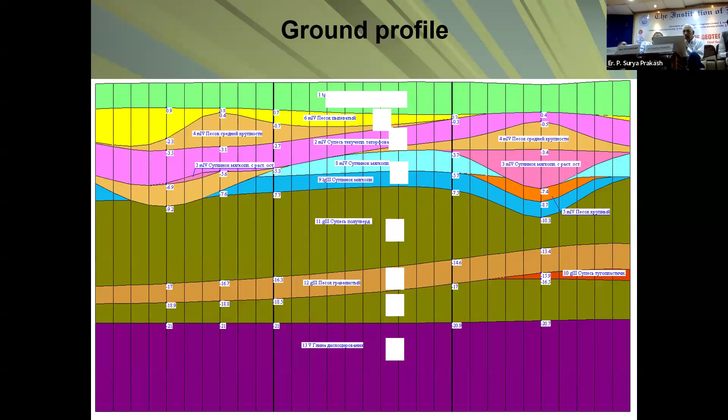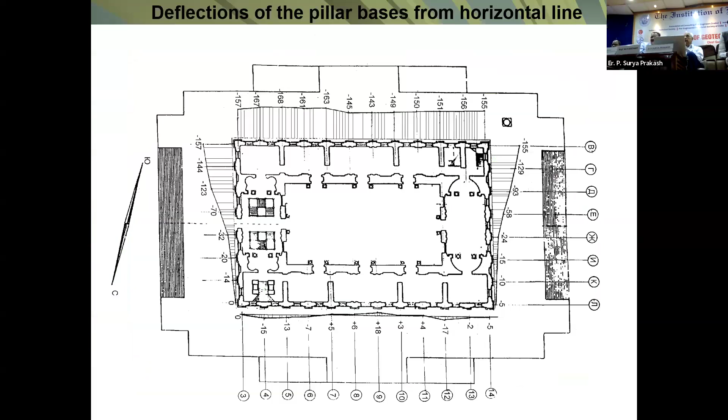Look at the kind of picture they got. These are the properties, the ground profile. Then they started the settlement contours, then they found out the horizontal displacement, then they found out the crack pattern. Can you imagine us ever doing that kind of thing together in analyzing a building?